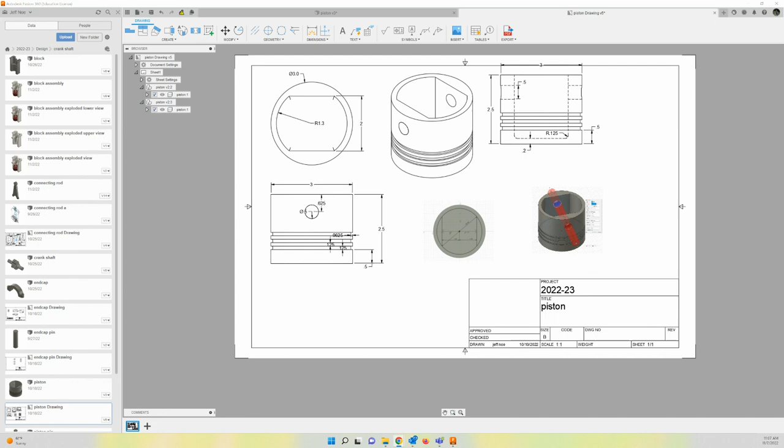Today's video is going to cover the creation of the piston. Not our last step, but the last big step in the creation of our crankshaft and cylinder. So you've got the diagram up in front of you. We have the piston here.

Let's zoom in. Looks like, looking at the diagram, we have a cylinder that's 3 inches in diameter. It's 2.5 inches tall. It's got some grooves cut out that appear to start at the half-inch mark working up. And we've got a hole here where the piston pin goes through. Now as you'll see in the piston pin, it's going to fit flush to this rounded outer edge, and there's a trick on how to do that.

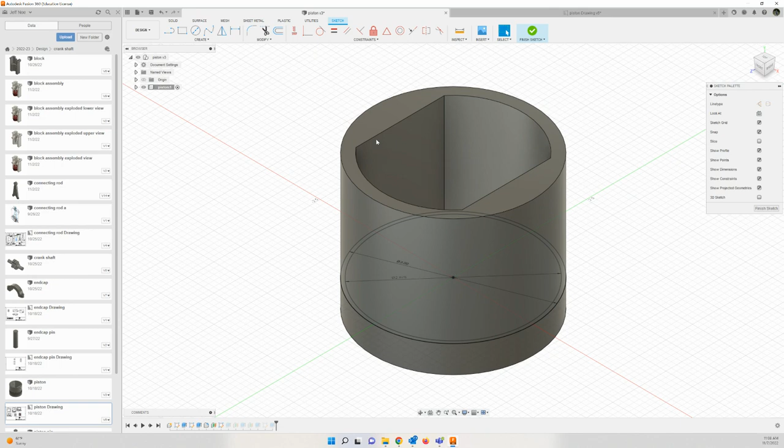So in starting this project, let's go look at the final version here. Let's close the sketch. All right, so that's what it looks like. We start off simply by creating our outer shape, the diameter of the piston, and extruding it up. Then we're going to create a sketch on the top plane.

Okay, if we go back to our dimension sheet, we're going to see that we've got a rounded edge here running the length of where the pin would go through from hole to hole here. So this edge is rounded off. And what's the radius of that particular circle? That circle's a 1.3-inch radius. So you can convert that to the diameter when we do the sketch on top. I drew my circle first.

Then we also have the dimensions where this edge to this edge is 2 inches across. So as we did in the connecting rod, I created a center rectangle that had that width of 2 inches, and then identified where it intersected with my inner circle there, and was able to use that as the shape for my cutout going down.

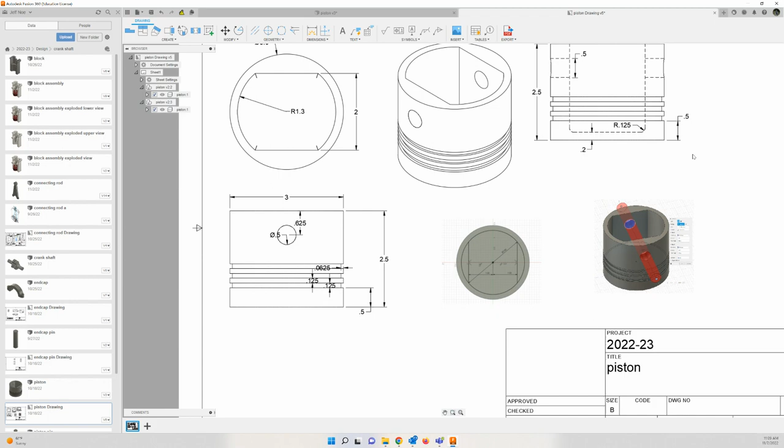It looks like when you look at these edges in this diagram, this is our inner cutout, those dotted lines. Looks like we've got a fillet with a radius on the inner bottom edge of 0.125 inches. All right. The gap shows us how far we go down. We know what the total height is. Looks like we got 2/10 of an inch between here and here. So that would help us with the depth of our extrude in this step when we finish this sketch and cut it out. After we do that, we're going to create a construction plane from the bottom.

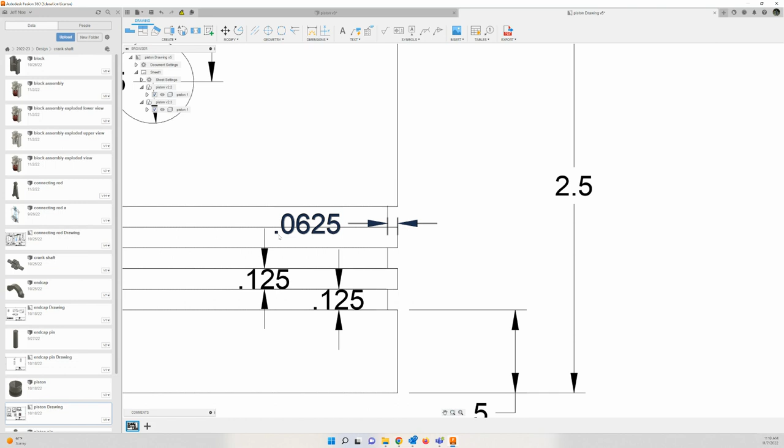We're going to create our sketch that shows the dimensions of the cutout. So there's two circles, one to match the outer diameter here, and then the inner diameter of the cutout, which we'll find there. If we go back to the drawing, we're going to identify that here. So this side is 0.0625 inches. So this is tenths, hundredths, thousandths, ten-thousandths. But what you've got to remember is that's just one side. We've also got it over here too.

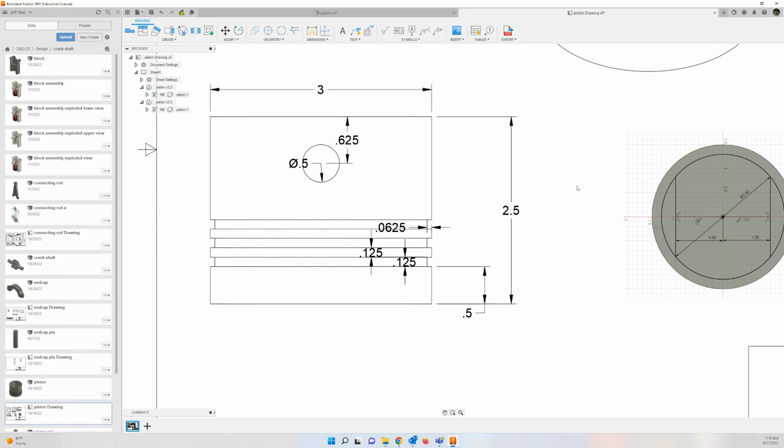So that second circle is actually going to be 2.875 inches in diameter. So the total, when you add these two together, is 0.125 inches. All right, 0.125, thousandths of an inch. Tenths, hundredths, thousandths, yeah.

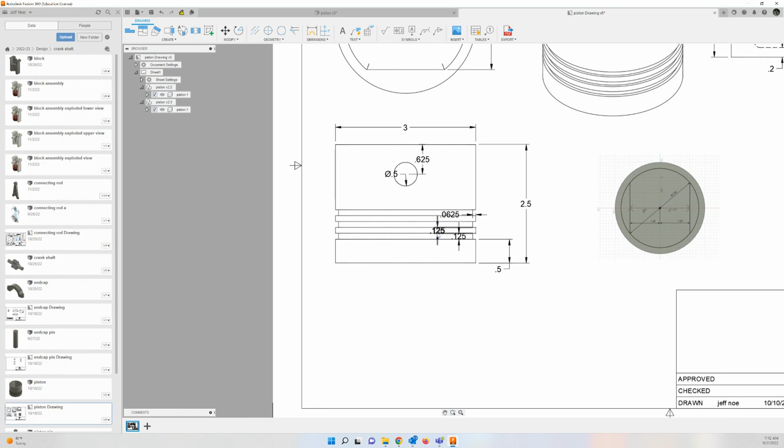So we've got that sketch where, on our construction plane, the outer circle would be the full 3 inches in diameter. The inner circle would be 2.875 inches in diameter. And then we would extrude that up, the height identified there, and cut that material away. Then we'd create another construction plane at the level that this one would be. So you're going to have to add to get up there.

And a third construction plane that we would apply the initial sketch that we created here to cut out the bottom one. We can change it to start from an object and use that sketch to cut out this groove, the other two grooves.

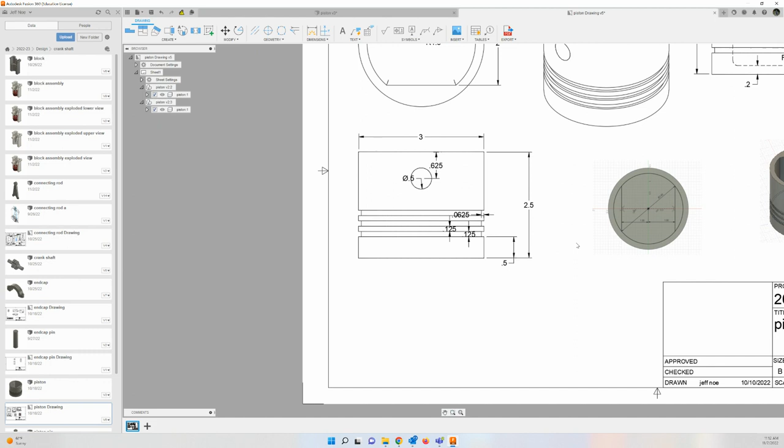The last step then would be these holes for the piston pin to go in, and the connecting arm will come down and connect around that pin as it's locked in here. I would sketch that on one of these interfaces here, and from our diagram it shows us it's 0.625 of an inch down the center of it. The hole is 0.625 of an inch from the top edge here, centered. And the diameter of this hole is 1/2 an inch.

And when you've got that sketch, you can extrude it in both directions so that it cuts a hole on both sides. And you'll be done with the piston itself. It's that easy. And let's see, I think the next video will be the piston pin.

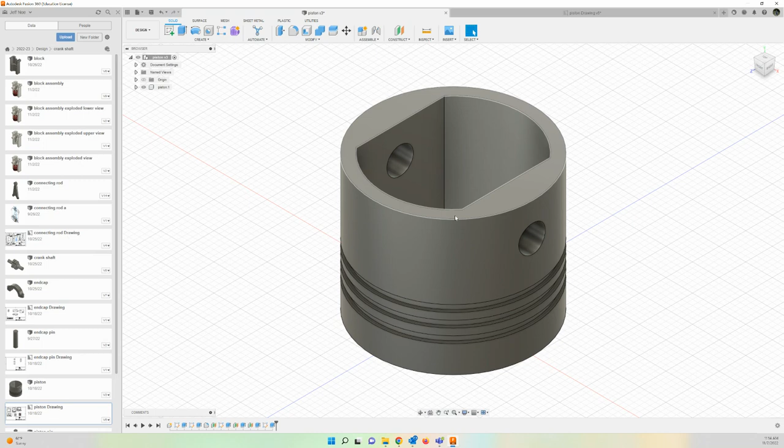And the end cap pins, if you know how, they are just a straight pin. This is the easiest piece. Okay, we created a component. I did a cylinder, and I'm going to edit that feature so it is extruded 1/2 an inch up, and the diameter you can find in the drawing, and that's all the end cap pin is, not the piston pin. The piston pin's easy, but not quite that easy.